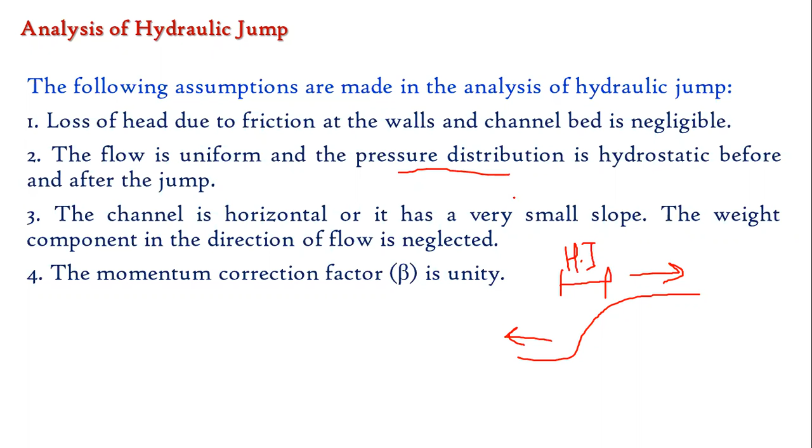This is similar to the pressure distribution in a tank of static water or in a reservoir on the upstream side of a dam. The distribution of pressure is hydrostatic, meaning it is zero at the surface and increases as we go deeper, becoming maximum at the bed, or at the base of the tank or dam. So that is one assumption we make.

Then the next assumption is that the channel is horizontal or has a very small slope. So at the point where the hydraulic jump is going to occur, we are not going to consider the slope.

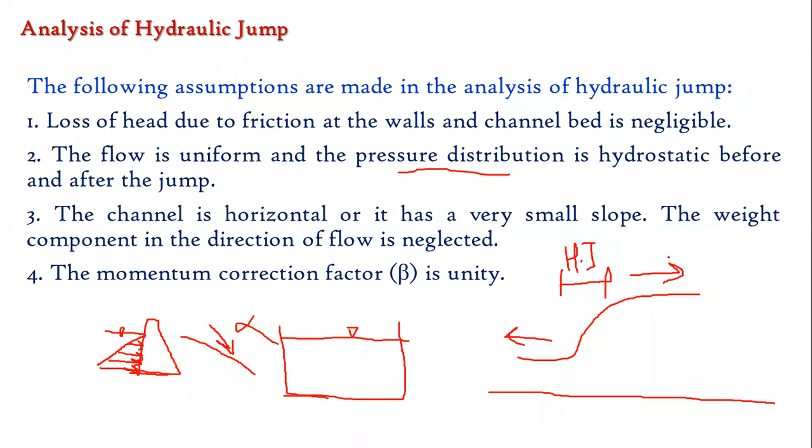The component of weight is also in the direction of the flow, so we are going to neglect that. So these are some of the assumptions of the hydraulic jump we made. Now today we will come to the derivation part.

In today's lecture we will be deriving the equation in order to find out the height of the hydraulic jump. The outcome of today's lecture is that after the end of the lecture, students will be able to calculate the height and length of a hydraulic jump.

And what is its significance, or what are its benefits? This lecture is important for engineers while designing hydraulic structures such as a dam or a weir. When you design a dam or a weir, you have to keep in mind that the downstream soil does not get eroded.

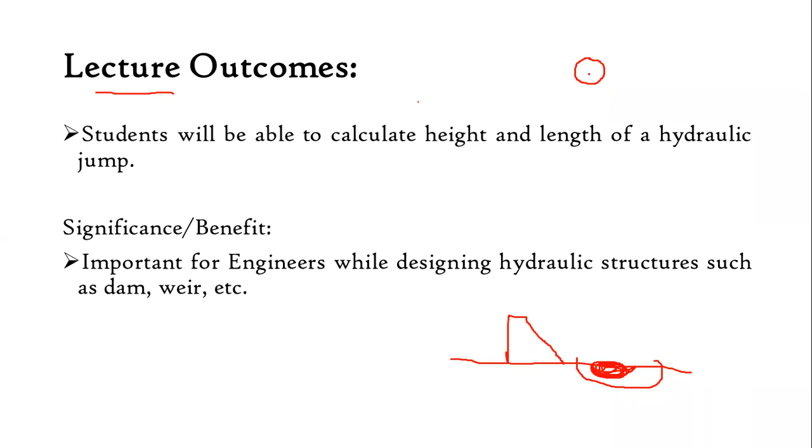It will reach the toe of the dam or the weir, and if it reaches the toe of the dam or weir, there is going to be a tension which takes place, and which is going to disturb the equilibrium between the heel and the toe of the dam.

Thereby, it is going to reduce the stability of the dam, and the dam or weir may fail. So we have to design different structures on the downstream side of the dam.

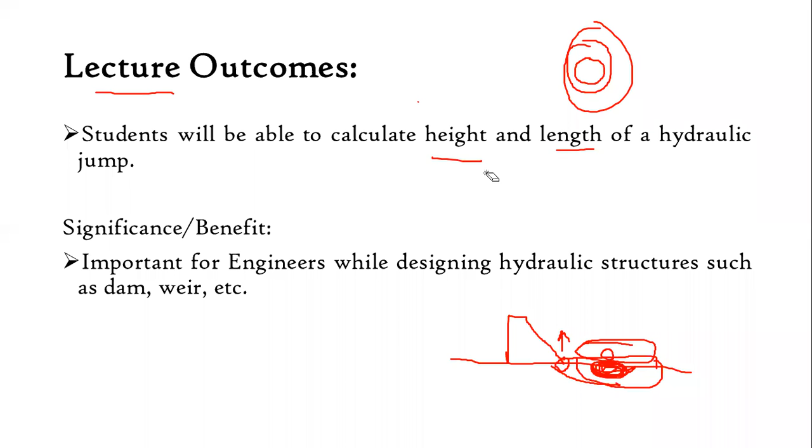So for that, we are conducting this lecture, and after the conduction of the lecture, students will be able to calculate the height and length of a hydraulic jump. So this is the lecture outcome. Now let's proceed in order to find out the height of the hydraulic jump.

Now, how are we going to find out the height of hydraulic jump? Let me show this image with the help of a pen. So here the hydraulic jump is taking place, with some eddy currents and turbulence formed.

The depth of flow before the hydraulic jump is supercritical depth, and I can consider it as y1. After the hydraulic jump has taken place, let the depth where the supercritical flow converts to subcritical flow be considered.

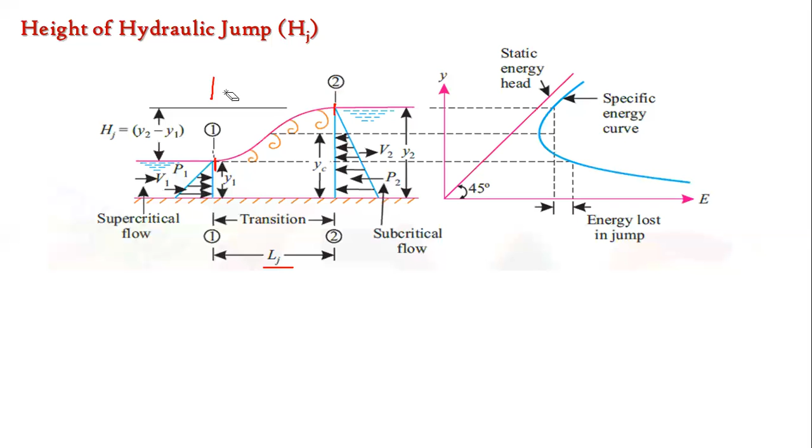Okay. Now let us start with height of hydraulic jump.

Is the screen visible to you all? Yes, sir. Now, as you all have studied, what is small q?

It is nothing but discharge upon width. Discharge per unit width is nothing but small q. Now, as you know, discharge is constant at any point in the flow. Similarly, if we consider a prismatic channel, width will also be constant at any point during the flow, and hence this small q, discharge per unit width, will also be constant at any point in the flow.

Now, let us consider a rectangular channel. What will be q? It will be area into velocity upon base width. What is the area of a rectangular channel? It will be velocity into width into depth, divided by b. If I cancel b in the numerator and denominator, I will get v into y.

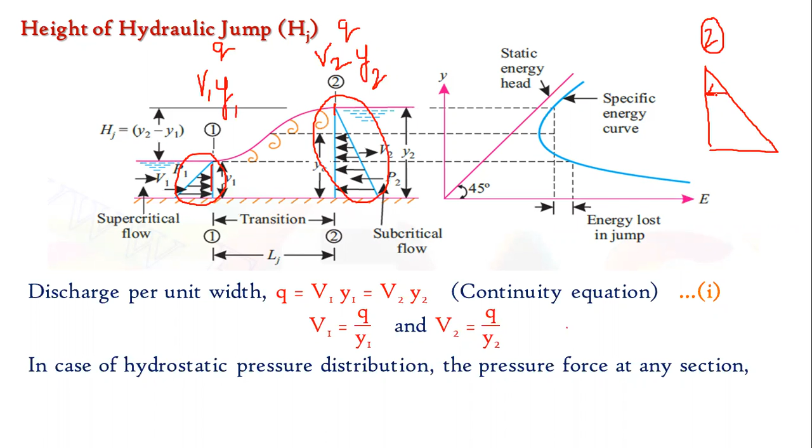This total horizontal length denotes the magnitude of pressure. At the surface of water, pressure is 0. As we go below, the pressure goes on increasing and is maximum at the base. So this is nothing but the hydrostatic pressure distribution.

And for hydrostatic pressure distribution, the pressure force at any section.

Whenever you watch this lecture again, you have to go through the notes of Unit 2 Hydraulics 1 of the last semester, on hydrostatic thrust on submerged surfaces. That was the point - how much hydrostatic force is on a vertical surface, on an inclined surface, and on a curved surface. We calculated the formulas for each of these.

So you can check the pressure force at any section for a vertical surface. It is P equals gamma into A into Y bar, where gamma is the specific weight of water, area is the cross-sectional area of the vertical surface, and Y bar is the distance of the centroid of that surface from the free surface of the liquid. This is your Y bar.

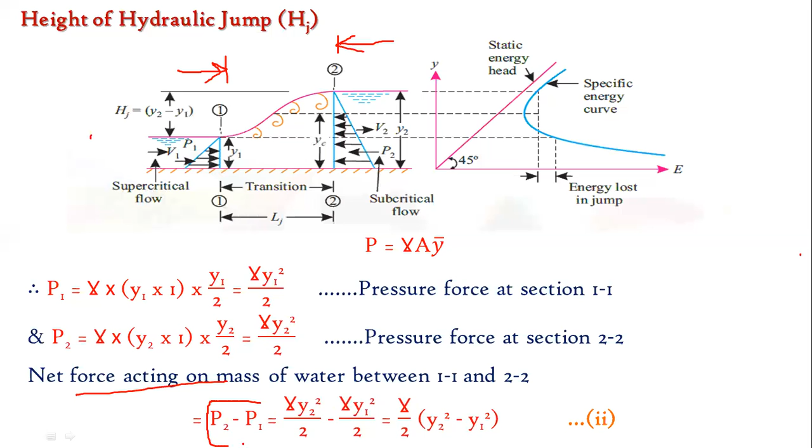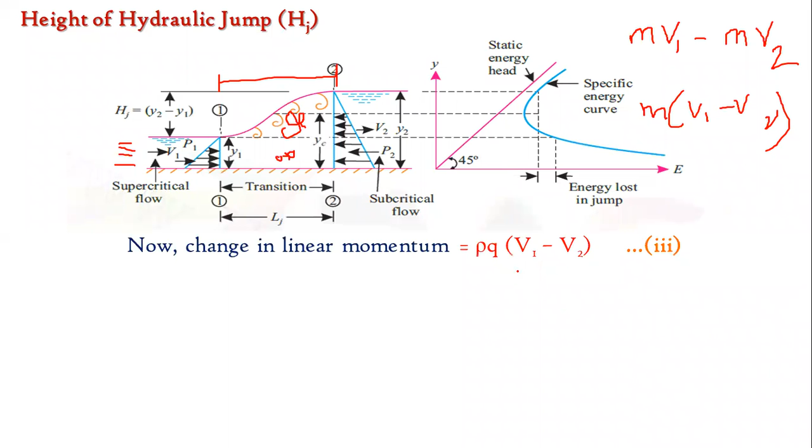But according to the impulse momentum equation, net force between section 1 and 2 will be nothing but rate of change of momentum, in the same direction. Therefore, P2 minus P1 of equation number 2 will be equal to rho q into bracket V1 minus V2 of equation number 3. This is what we found out.

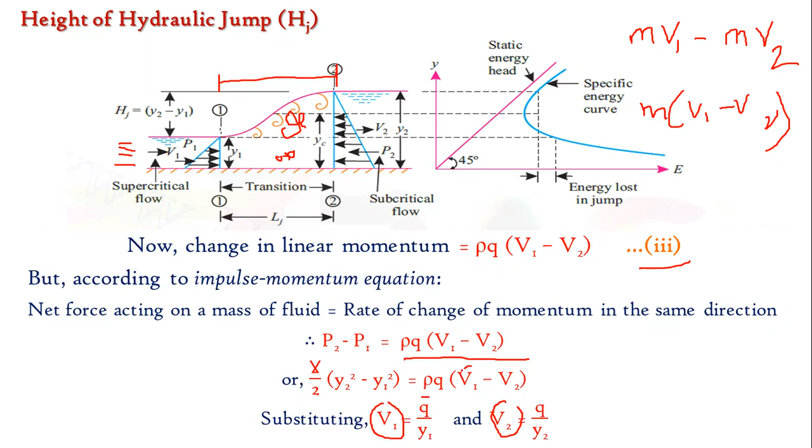Then next we substituted it, and we have come up to this point. We have cancelled y2 minus y1 from both sides. What remains is: g by 2 into y2 plus y1 is equal to q square upon y1 y2.

So this is what remains. Now we take y2 plus y1 to one side, and g by 2, which was on the left hand side, I have converted to the right hand side. So my equation becomes 2q square upon g into bracket 1 upon y1 y2, which is our equation number 4.

So in equation number 4, what we have done is we have found out the equation in the form of y2 plus y1, depth of flow at section 2 plus depth of flow at section 1.

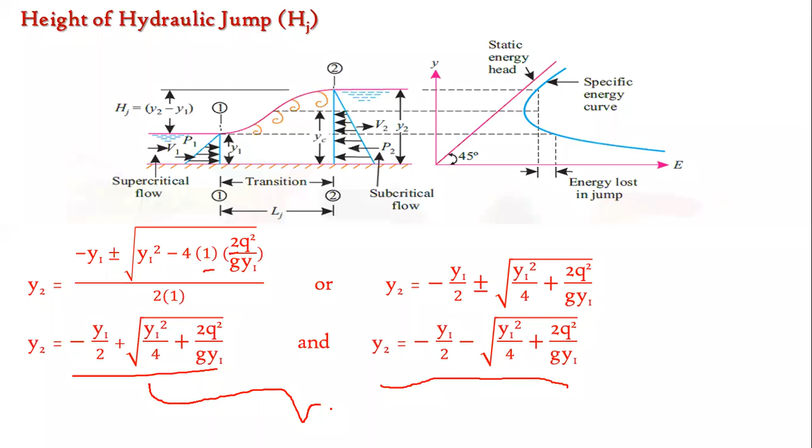आता दोन्ही टर्म मधलं इमॅजिनरी टर्म कुठली आहे, कोण सांगतंय मला? 2 व्हॅल्यूज भेटलेले आहेत. ही पहिली व्हॅल्यू आहे, 2 रूट्स भेटलेले आहेत असं मी म्हणतो. तर दोन्ही मधलं इमॅजिनरी कुठलं आहे, कोण सांगतंय? Can anybody tell?

y2. दोन्ही y2 चेच आहेत रे बाळा, दोन्ही y2 चेच रूट काढतोय आपण, मायनस प्लस सर. म्हणजे पहिलं का दुसरं म्हणतोय तू? पहिलं सर. पहिलं का?

ते बघ y2 चं पहिलं रूट बघ, मायनस y1 by 2 प्लस हे जी व्हॅल्यू, फॉर एक्झाम्पल मायनस y1 by 2 तुझं येतंय मायनस 2 सगळं कॅल्क्युलेट करून, प्लस ही जी सेकंड टर्म आहे ही फॉर एक्झाम्पल 4 आहे. तर तुझी व्हॅल्यू कशात आली, ही पॉझिटिव्ह मध्ये आली +2, आणि डेप्थ कशी असती, पॉझिटिव्ह असती.

पण जर तू सेकंड रूट जर बघितलं, मायनस मायनस दोन्ही मायनस आहेत, -2 -4 -6, y2 ची व्हॅल्यू कधी मायनस मध्ये असू शकेल का? कधी डेप्थ निगेटिव्ह असते का? असते का नाही? No sir. Sir, understood what I'm trying to say? It is basic mathematics. Yes sir.

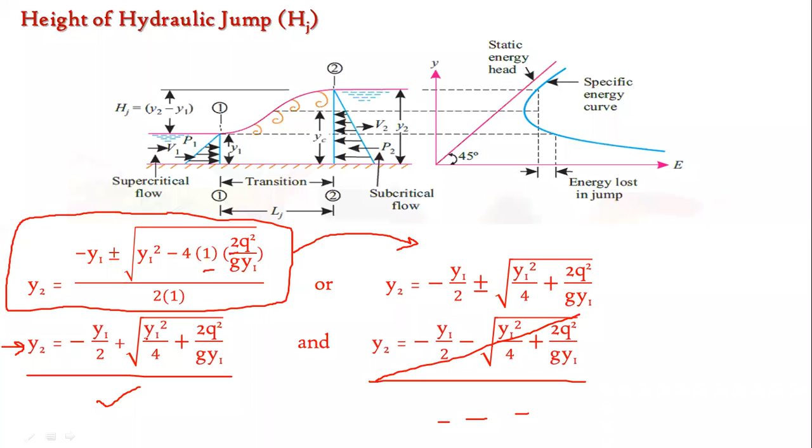So there is only one root that I get. Y2 is equal to minus y1 by 2 plus square root of y1 square by 4 plus 2q square upon g y1. तर इथे बघा आपण केलं neglecting the second root which is a negative depth we have. जो पहिला रूट होता आपण तो घेतलेला आहे. आता पुढं.

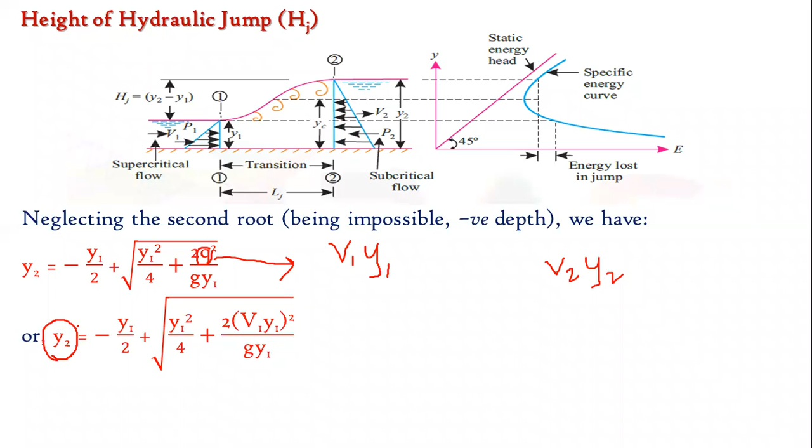Okay, next what we will do, this q again we are going to substitute the value v1 into y1 because आता v2 y2 का घेतलं नाही सर तुम्ही v1 y1 च का घेतलं. तर तुम्ही जर ऑब्झर्व करत असाल मला y2 ची व्हॅल्यू फाइंड आउट करायची आहे इथं आणि y2 ची व्हॅल्यू फाइंड आउट करण्यासाठी ह्या राईट हँड साइडला मी सगळे व्हॅल्यूज कशात कन्वर्ट करतोय जर तुम्ही बघितलं y1 मध्ये. ओके इथं y1 आहे इथं y1 आहे इथं y1 आहे. सो इट इज बट नॅचरल दॅट हिअर आय एम गोइंग टू टेक v1 y1.

ओके आय एम जस्ट एक्सप्लेनिंग यू द कन्सेप्ट, ओके and the reason behind. नाहीतर म्हणाल सर इथं v2 y2 लावतो मी काय प्रॉब्लेम आहे. लावा परत तुम्हाला अजून 4-5 पेजेस अजून डेरिव्हेशन मध्ये जातील तुम्हाला. Okay, next.

So this is the formula for y2. y2 is equal to minus y1 by 2 plus square root of y1 square by 4 plus 2 into v1 square y1 upon g. 2v1 square y1 upon g काय तर y1 square divided by y1, हे जर स्क्वेअर रूट जाणार y1 चा आणि इथला खालचा y1 जाणार. सो 2v1 y1, 2v1 square y1 upon g.

This is your equation number A, that is, it is the first equation using which you can find out the depth. आता जर तुम्ही y2 फाइंड आउट केलं तर तुम्ही हायड्रॉलिक जंप इझिली फाइंड आउट करू शकता. कसं असणार आहे, y1 तुम्हाला फाइंड आउट करायला इझी असतंय.

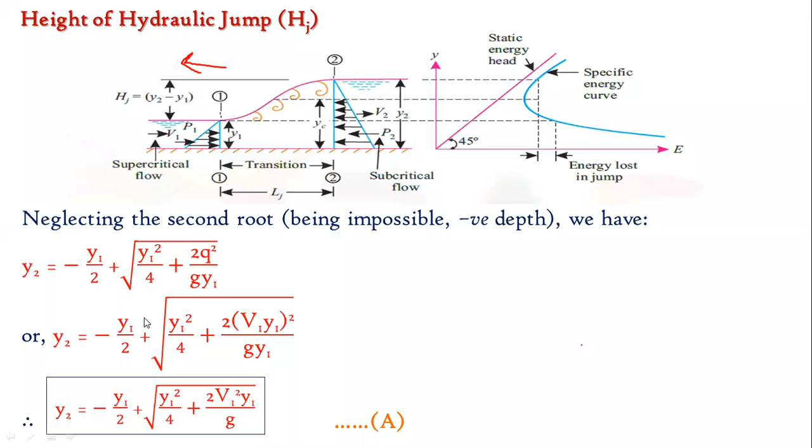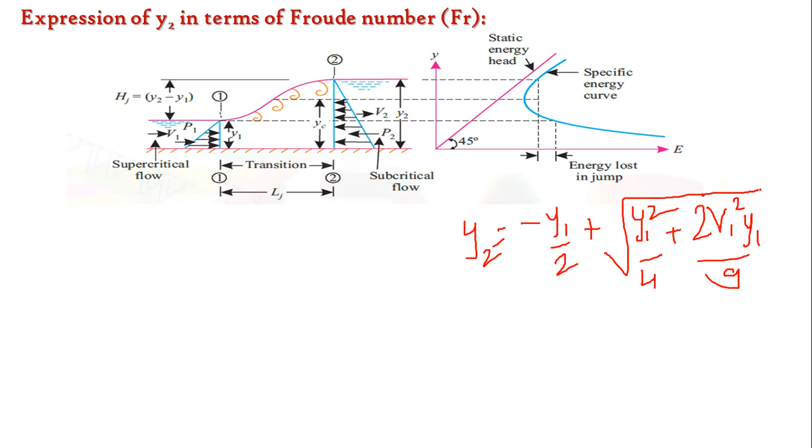Minus y1/2 plus y2 is equal to minus y1/2 plus square root of y1 square by 4 plus 2v1 square y1 upon g. This is my equation number A from the previous slide.

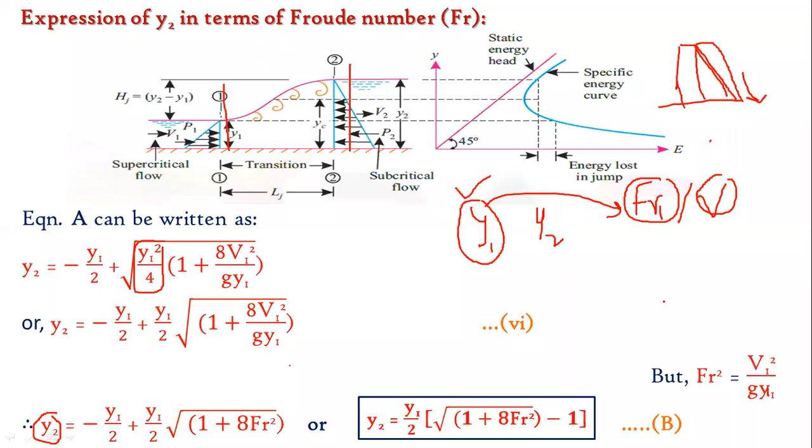Okay, so is today's lecture understood by all? Have you understood today's lecture? Yes, sir. Any problem? Okay, if you have any doubt, then you can do one thing.